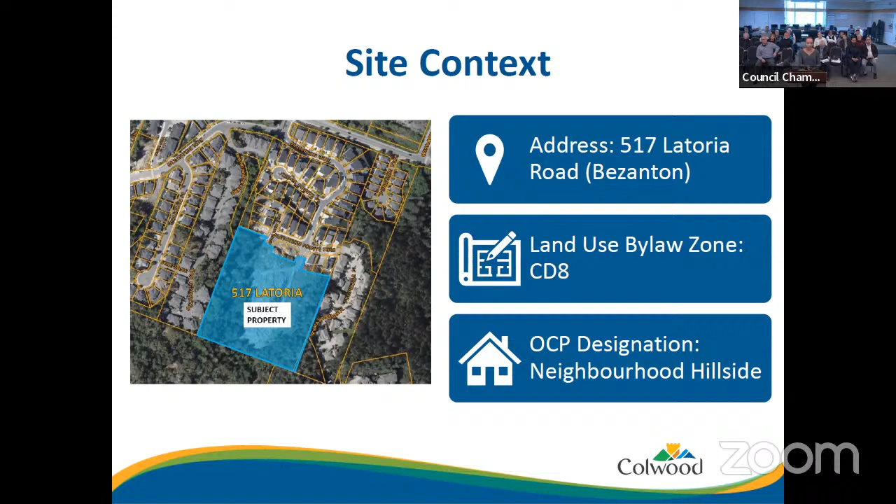Starting with the built form policy. So the neighborhood hillside designation supports ground-oriented buildings up to 3 stories, including multi-unit townhomes, and it supports a floor area ratio of 1.2. The proposal is for 3-story townhomes with an overall FAR, or floor area ratio, of 0.52. So both of these policies have been met.

With respect to the public realm policies, the neighborhood hillside designation requires proposals to improve the public realm for pedestrians, create a high degree of permeability, including direct walking connections between residential areas leading to and from frequent transit and local transit service, as well as to protect and optimize views from public spaces.

The first phase of this development improved the public realm for pedestrians and created a high degree of permeability, since it provided frontage improvements along the south side of Latoria Road, including a sidewalk, street lighting, curbs, boulevard grass, and trees. Views are not anticipated to be impacted from public open spaces such as Latoria Road, Madrona Bank Park, or Latoria Creek Park. So all 3 of these policies have been met by this proposal.

With respect to the natural assets, the neighborhood hillside designation requires that buildings be designed to protect the natural assets of the lands, consistent with site adaptive planning policies. Site adaptive planning is a general approach that involves identifying buildable and non-buildable areas and arriving at a site plan that reflects site opportunities and constraints, maintains natural systems, and minimizes disruption to natural features. Development should be clustered to protect and preserve natural features, and when development is proposed on a greenfield site, 40% of the property should be retained as private or public open space.

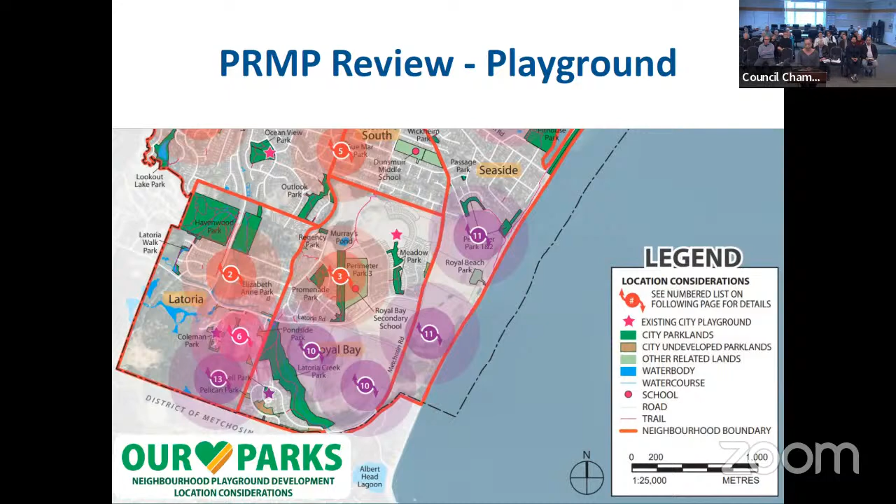As explained in the staff report, Pondside Park is not a viable option for a playground due to its steep terrain and natural features. Therefore, to achieve the objectives of the Parks and Rec Master Plan, the city would either need to identify an alternative location for a playground or have one provided as part of this rezoning application. The staff recommendation includes a requirement that staff first seek endorsement from council through the Parks, Trails, and Recreation Committee on this playground location before advancing it to first reading.

The Parks and Rec Master Plan also shows a desire for a beach-to-mountain trail network, as shown on this slide, starting at Pondside Park and Propeller Place and ending at Madrona Bank Park before continuing down to Latoria Road. The applicant has indicated that this trail connection might not be feasible, specifically at the northwest corner of their site, due to the riparian area and steep grades there, and therefore they are not proposing to provide this trail connection.

Similar to the previous slide, we'll be making a recommendation to the Parks, Trails, and Recreation Committee and Council on an alternative route connection that can still meet the objectives of this requirement.

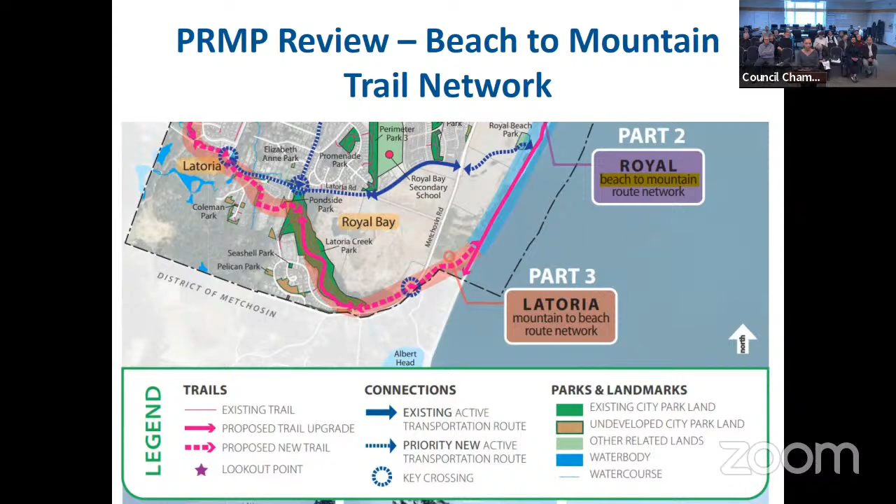Lastly, the Parks and Rec Master Plan also requires a neighborhood connector route, heading alongside North Latoria Creek Park, indicated by the red dotted line at the bottom of the screen. Similar to the previous issues with steep grades and environmental features, that trail connection might not be feasible in this location, and the applicant has indicated they're not able to achieve the connectivity originally envisioned by the Parks Plan. To achieve the objectives of the Parks Plan, alternative trail connections will need to be explored with the Parks Department and brought forward to the Park, Trails, and Rec Committee, as well as Council, for endorsement before we advance this application too far forward.

So the recommendation in the staff report reflects this requirement, and we'll be working with the applicant and the Parks Department to come up with an alternative solution for this as well before we advance this to first reading.

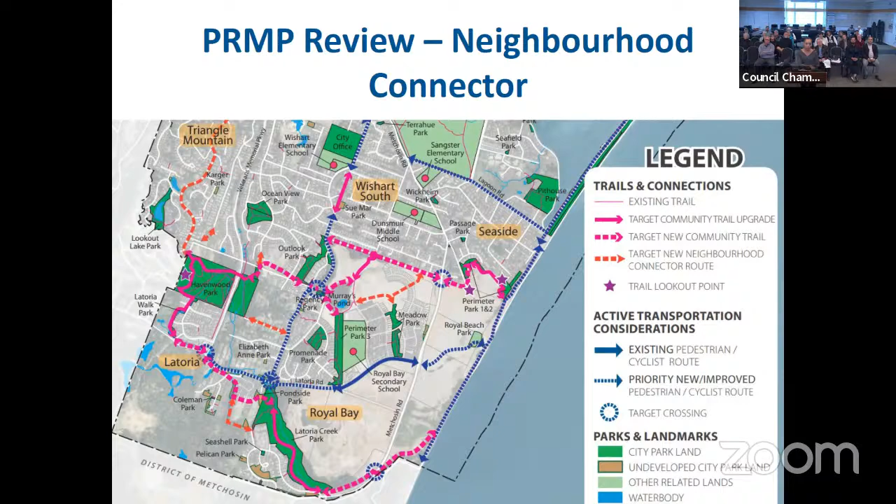With respect to communication for this application, the applicant has led neighborhood consultation in January and February earlier this year. The development notification sign was also posted on the property in February, and before the application advances to first reading, the neighboring properties will be notified by mail via postcards, and advertisements will be published in the Goldstream Gazette.

So the staff recommendation is to rezone the subject property to permit an additional 18 units, increasing from 59 to 77, as well as to permit attached housing and duplex use, subject to the conditions described in the staff report. Other options before you are shown on this slide, and I'd be happy to amend these as seen fit by the Planning and Land Use Committee. I think that's all for me.

The applicant is also here tonight and will be presenting to you as well, and we're both available if you have any questions afterwards. Thank you.

Great, thank you Desiree, appreciate that. We do have the applicants here as well. I believe Ivana and Ivana — I'm going to butcher your name, I'm sorry — Kavarchuk, and Mike Wignall, of course. So if you're ready to go. Thank you, Mike. Thank you.

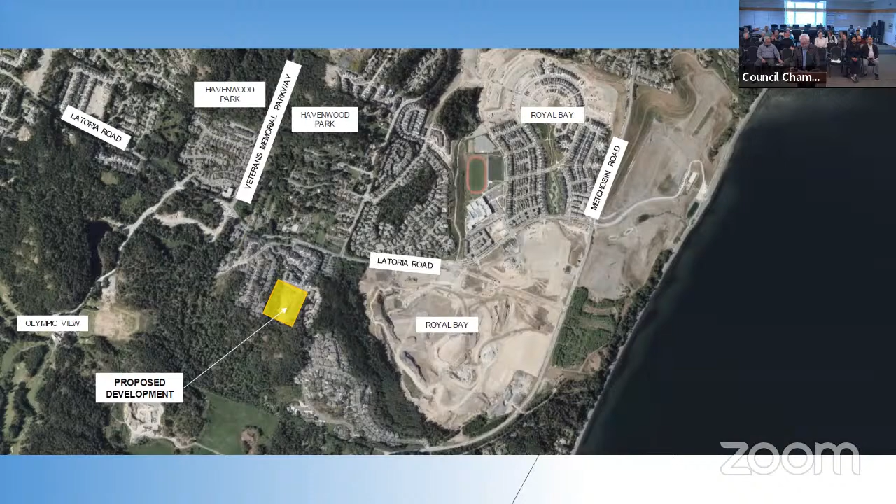Now, location. The site is located immediately south of Elevation Pointe Terrace, as Desiree has already said. It's shown in yellow on this slide. You can see Latoria Road slightly to the north, Royal Bay to the east, and Veterans Memorial Parkway to the northwest. This is a zoomed in version of the location plan.

Originally, the entire site fronted on Latoria Road, hence the address of 517 Latoria Road. As the first phase was developed, the remaining undeveloped piece is still referred to as 517 Latoria Road, even though it no longer directly borders Latoria Road. So that little bit of addressing bureaucracy was a source of confusion for some of the neighbors, as they assumed the site was on Latoria Road.

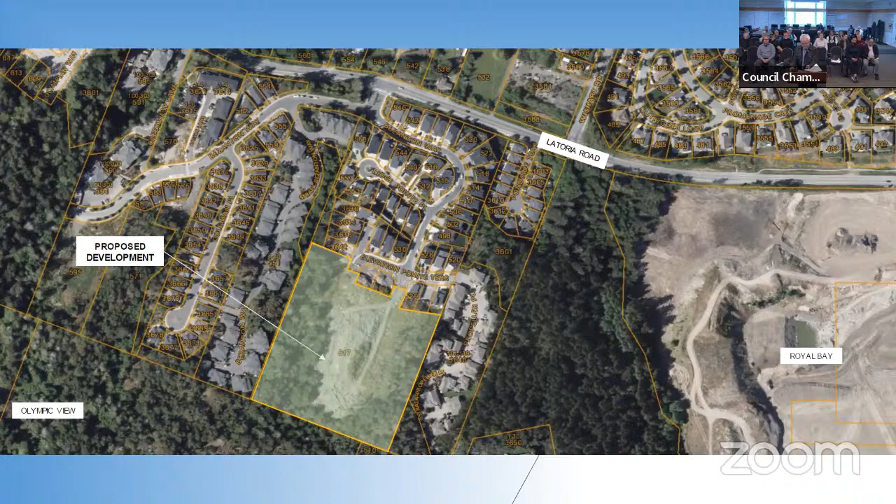This is a tighter version of the site. North is to the right on this picture. You can see Bezanton Way winding up from Latoria towards the site. Elevation Pointe Terrace runs up and down to the right of the site. Madrona Creek is to the west of the site, or the top of the picture. And Propeller Place is at the bottom of the picture, to the east of the site.

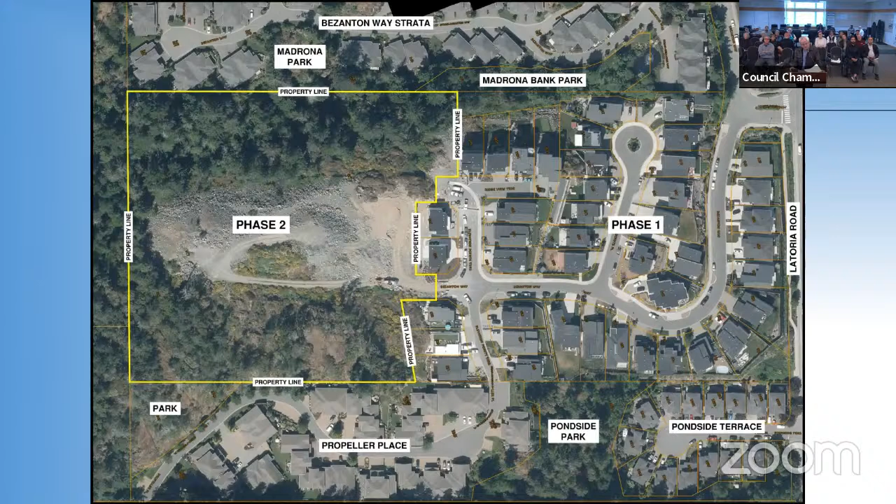The site history - let's just back that up. As I said earlier, the ownership group has owned the property since 1998. Phase 1 was completed in 2017. And phase 2, the current phase, we've been working on since 2017, trying to come up with a version that makes sense from a feasibility point of view and an approvals point of view, et cetera.

In the intervening years, we've spent a lot of time with the ownership group, City of Colwood staff, the project arborist, the landscape architect, and the biologist. We've also enlisted the help of a traffic consultant and a sharp-tailed snake specialist along the way.

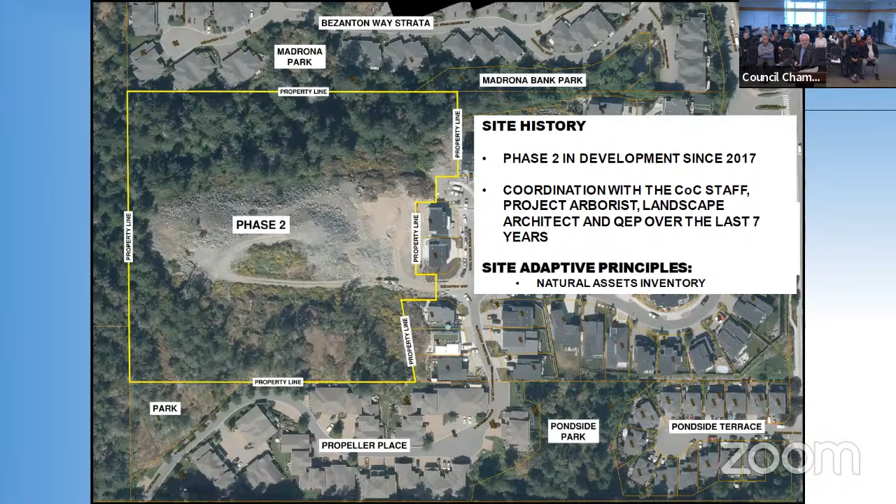We've employed site adaptive planning principles. We've done a natural assets inventory. We've looked to protect habitat areas. We look to incorporate existing natural features. We're going to retain the tree buffers, minimize ecosystem disturbance, and maintain water flow pathways.

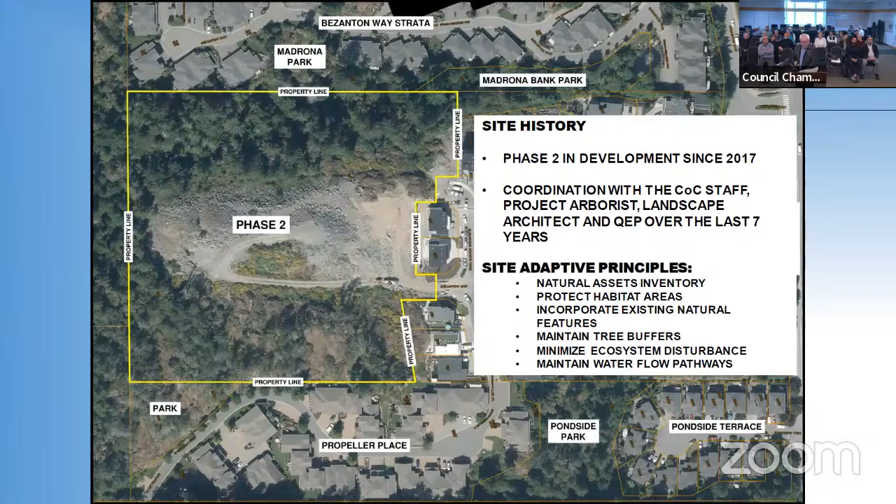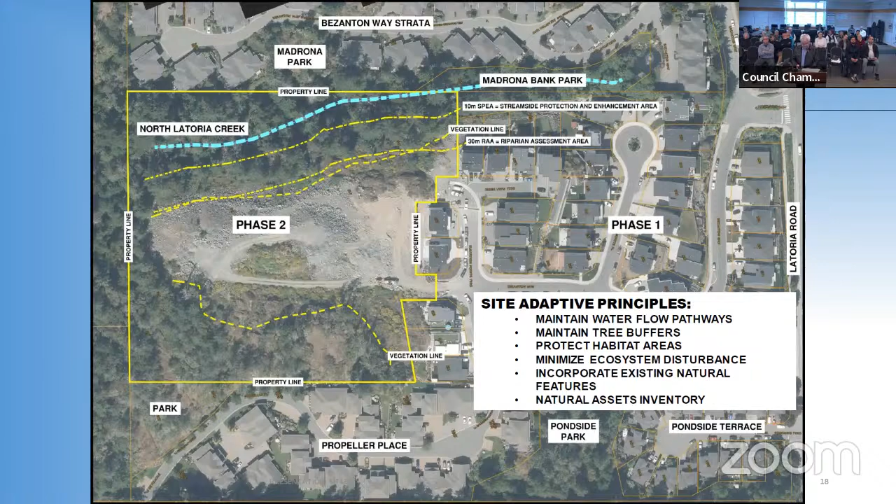And then here we are with the topography. You can see the various constraints encircle the site. The middle, where it's the blasted rock stockpile, is free of encumbrances. You'll note the land slopes steeply upward from Latoria Creek, or Madrona Creek, up to a plateau area where we have phase 2 labeled, where we would have the proposed development. And then there's another height of land on the east end of the property in the do-not-disturb zone that provides a natural topographical buffer from Propeller Place.

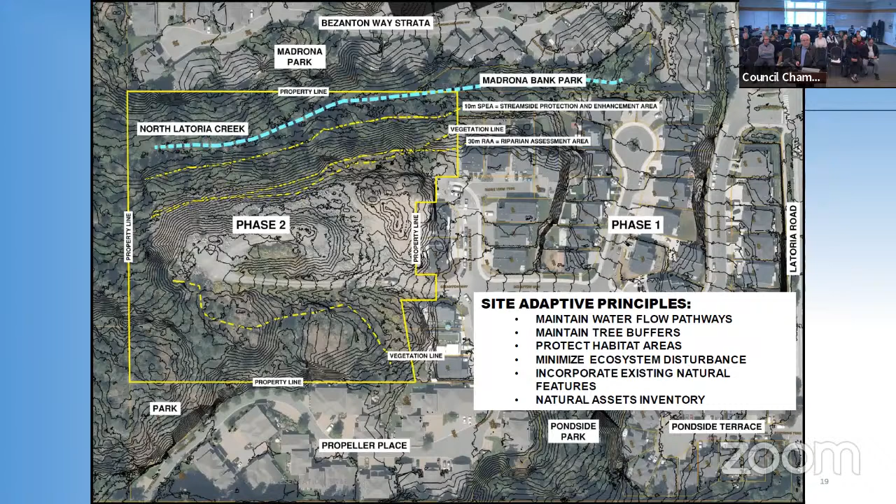Here is the current proposed layout of the site. As I mentioned before, we have one single family lot located in the middle upper of the screen, intended to fit into the existing neighborhood.

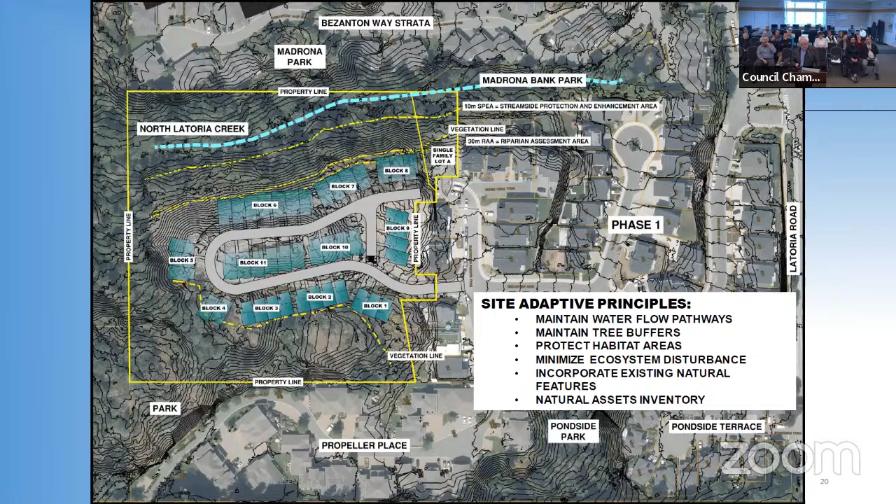The rest of the site is 44 townhouse units proposed. Here's a cleaner version without the contours.

As Desiree says, we're proposing 15,500 square meters of open space, which is a little over 50% of the project area.

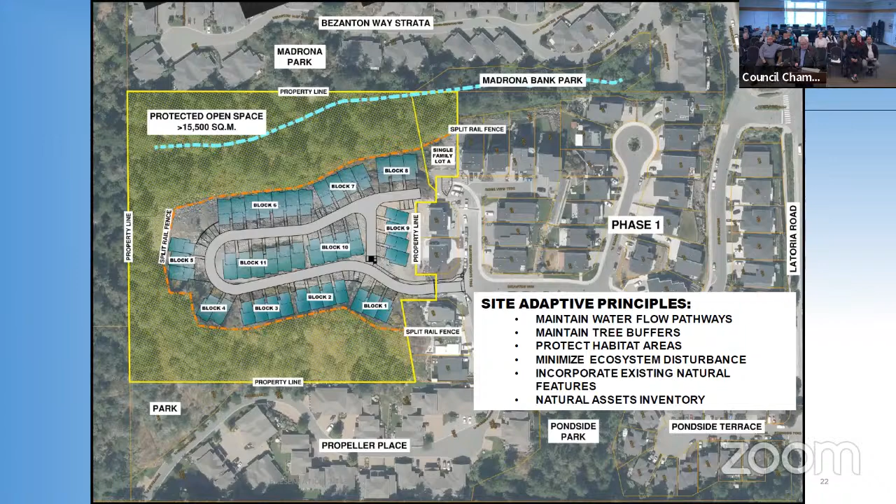We had 2 community meetings. We've worked with the team since 2017, and following our initial application we went through several tweaks and adjustments. We're convinced in the viability and technical feasibility of the proposed development, and we felt it was time to go to the neighborhood to show them our proposal.

We had 2 meetings, one on January 24th and a follow-up on February 12th, both at Wishart Elementary School. Attendance at both meetings was about 30 to 40 people.

There were a number of concerns raised: loss of privacy for existing residents, density being too high, traffic generated by the development, and the amount of visitor parking we were proposing. There were questions about impacts on the existing trees and Madrona Creek, and concerns about emergency vehicles accessing the site as well as our on-site road design.

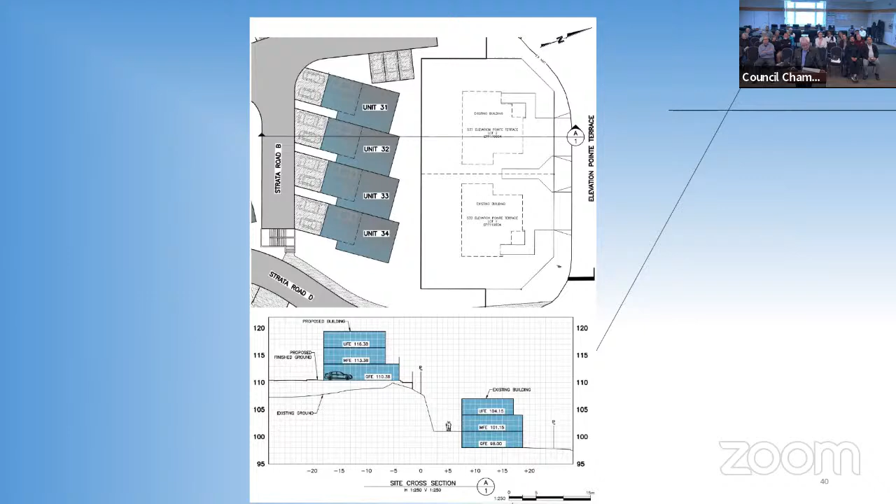There was also concern that we originally had a townhouse unit on the fee simple lot next to 3642 Ridgeview. As I've said earlier, we changed this from a townhouse block of 2 to just a single family dwelling. So this is just going to be another house in the neighborhood. It's topographically separated from the rest of the site and quite a bit lower, so it just seemed natural to make this visually a single family lot to address on its own.

For density, there's concern that phase 2 was originally expected to be 27 additional single family lots with suites. The original 27 lot layout would have caused more disruption to the existing forest surrounding the site because of larger footprints. It would also potentially generate traffic from not just 27 houses, but 27 suites as well, if every house was suited.

So while people are concerned that 44 townhouse units is quite a bit larger than the 27 lots proposed, in terms of traffic flow and units I think we're going to be less, because there will not be suites with the townhouse units. We've also had our traffic consultant review the latest proposal as well as earlier ones which had more units, and no issues were found. The roads were not being over-trafficked, and the intersection at Bezanton and Latoria was not at a point where it needed a signalized intersection or anything like that.

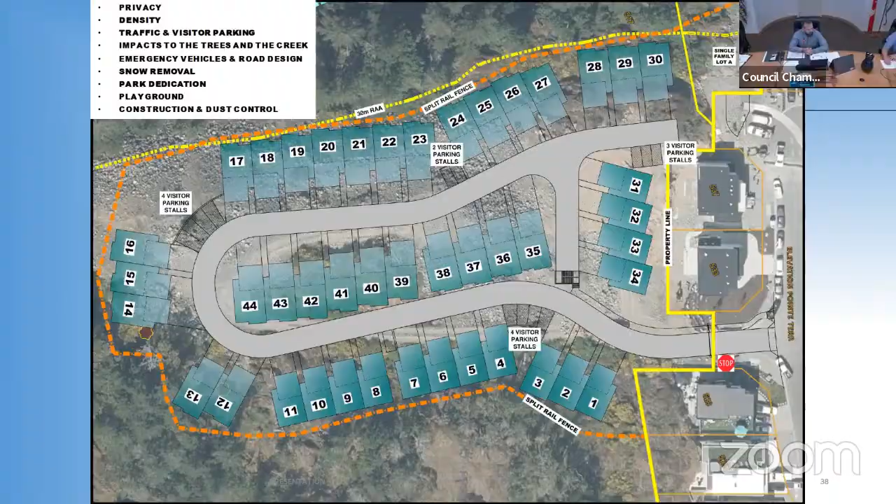This question is for both the city and the developer. The first question I want to ask is about the evolution of this particular development and the proposals you've made. When it started out, when you applied to the city, did you convey the fact that a playground was not feasible? And also did you convey - upselling is probably not the proper term - the notion that it would originally have been single family dwellings, and then you changed your plan to move to presumably higher density? I understand your point that townhouses don't get suites, which speaks to density, but I'm trying to get a chronology here. Was a playground ever in the plan? And Ms. Gibbons, I'd like to hear your input too, because I want to hear from both parties, to understand how this all evolved.

I'm going back a long ways here - I started working on the project in the early 2000s, and then the project evolved. At one point I had a project manager working for me who ran with the project for about a decade. I recently, in the last few years, came back involved in it. From my memory, since I wasn't directly involved in the first phase, there was a layout with single family housing up into this phase 2 land, and some smaller areas of park saved toward the east and the higher areas of the site. I don't recall it being discussed as a playground specifically - I think it was clearly identified as park - but Desiree might be able to clarify that.

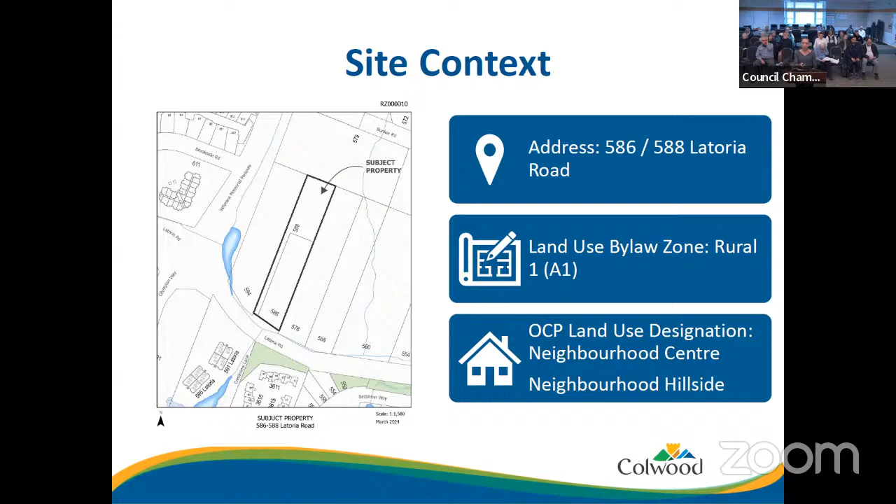The application doesn't comply with either of these two land use designations, and I'll highlight where it deviates from the OCP designation in the next few slides, starting with the neighborhood center designation. In neighborhood centers, the built form supports low-rise multi-unit residential buildings up to 4 stories at the core of the centers. The application before you tonight is for a 6-story apartment building, so it doesn't comply.

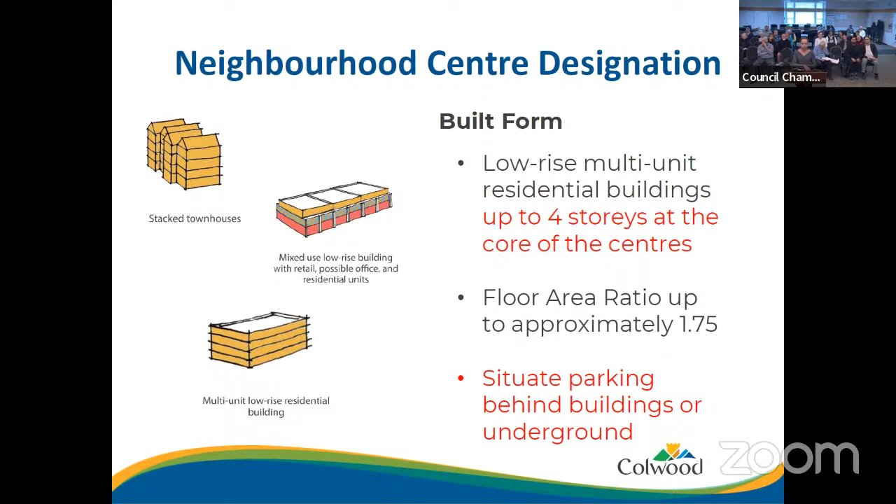The floor area ratio is permitted to go up to 1.75; the applicant is proposing approximately 1.6, so that's compliant. The OCP also encourages parking to be situated underground or at the rear of buildings. The applicant is proposing 2 stories of above-ground parking as well as surface parking on the adjacent sides neighboring the lot at 594 Latoria Road. Staff understand that because of site conditions, underground parking could potentially be challenging here. However, the OCP does call for parking to be located underground when possible.

In terms of land uses, the OCP supports small-scale neighborhood-serving retail uses. This application includes a daycare proposed for the ground floor, which would be an example of a small-scale neighborhood retail-serving use, compliant with this designation. It also supports a range of housing types and choices to support businesses. The proposal is for a 122-unit apartment complex, which would increase housing choices for future residents of Colwood and attract them to use businesses in the neighborhood center designation.

In terms of the public realm policy requirements of the OCP, it encourages high quality public realm, including spaces for gathering, creating a high degree of permeability, including direct walking connections between the residential developments and the frequent transit network on Latoria Road. It also encourages protecting and optimizing views from public spaces such as Latoria Road. This proposal achieves all of those requirements, including providing frontage improvements along Latoria Road, which could potentially include sidewalks, landscaped boulevards, and a dedicated bike lane.

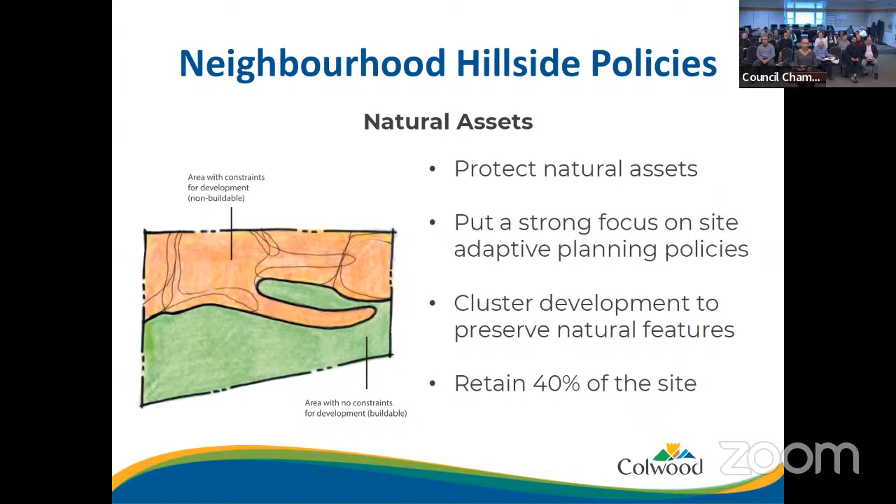Just in terms of the communication, the applicant did lead neighborhood consultation in June 2022, and the development notification sign was posted on the property in the fall of 2023. As I had mentioned, there is a neighborhood visioning exercise that is being undertaken for the Latoria North area.

So the staff recommendation is to postpone making a decision on this application until council first endorses one of the vision options for the area. This is partially because this visioning exercise will have significant, or potentially significant, implications for this proposal, and may even permit what is proposed without needing to amend the OCP.

This is a staff recommendation, but if you do support the application going forward, it would require an amendment to the OCP because it does not comply with either the neighborhood hillside or neighborhood center designation. But these are the options before you. Option 2 is to revise the application so that it does comply with one of the land use designations. Option 3 would be to prepare amendments to the OCP as well as the land use bylaw to support the proposal as it has been shown. Options 4 and 5 are to deny the application or to select another option as selected by committee.

And the applicant is also here tonight to provide or to present their application, and both of us will be available for questions if you have any afterwards.

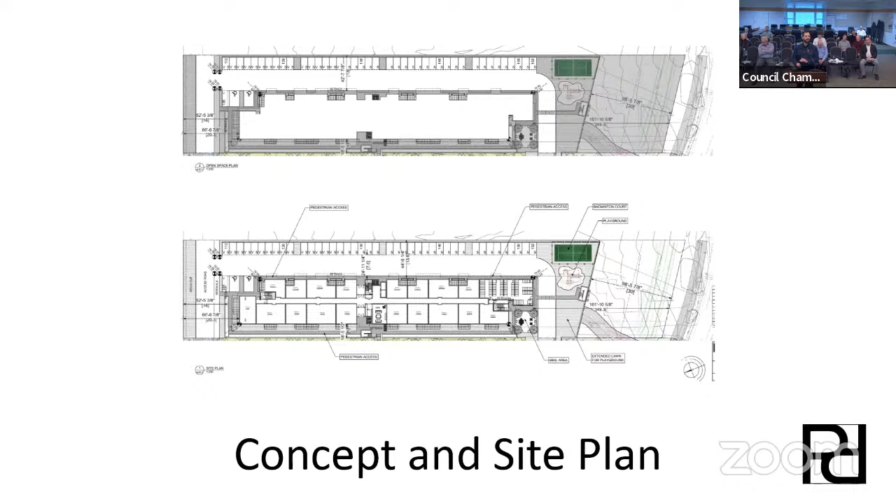And being able to benefit maybe some of the public amenity space by sharing those resources - having access points, having facilities designed and shared in tandem as one site's being built and the other can continue to be developed with a similar comprehensive vision.

Talking specifically to the alternate access onto Latoria Road, 594 Latoria, if you look to the bottom right here, you see the 594 Latoria Road access. Currently there is an existing access which would be maintained, and the initial proposal was to fork into 586 and 588. We're now looking to request moving that entire access as far back as possible to the top of the entry of 586 and 588 Latoria.

This benefits internal traffic flow. If you look at the way this road is positioned, it allows flow between the two parkades to be done, allowing traffic in and out of the two buildings to flow into the north road a lot easier, which would allow for exit onto VMP.

For the entry access, which would most likely be a right turn entry from Latoria Road, this would push it back away from the corner, so it wouldn't bottleneck potential traffic or bottleneck tenants turning into the property itself. So it supports, in my opinion—and I'll ask for commentary from our civil engineers if necessary—

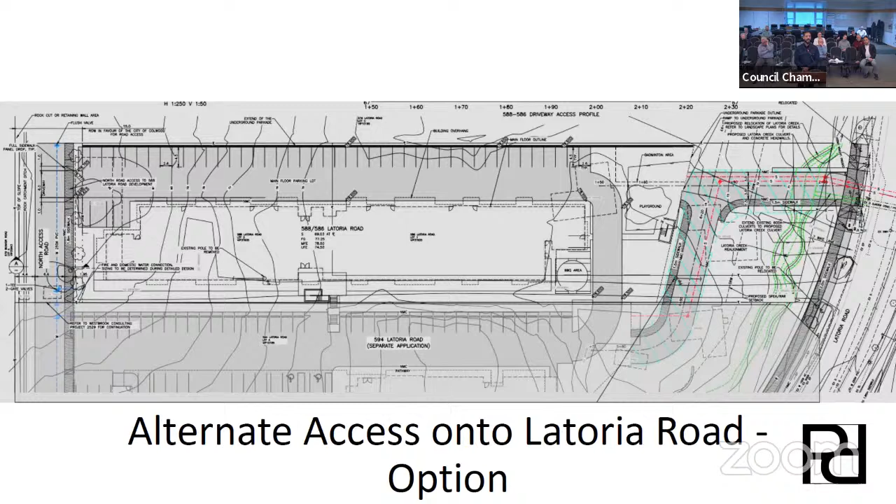it would improve substantially how traffic happens and enters into the subject properties. The creek realignment is a key item here, and I want to highlight that. It does a few things: it improves and enhances Latoria Creek substantially. At this point, Latoria Creek really is more of a ditch than a creek. Unfortunately, it's a hotbed of garbage and waste that's been strewn in from wherever. This realignment was done in line with the visioning happening with the enhancement of the corner at VMP and how that realignment was positioned to happen.

A little bit of context: we provided a statutory right-of-way on 594 Latoria to allow for realignment of the creek. A lot of that realignment was that the SRW was provided for realignment to happen in tandem with 4-laning or 5-laning Latoria Road, widening of Latoria Road. We understand that may or may not happen in the future. However, we've still provided the process and way to do that on 594, which allows for a substantial enhancement of the creek—by pushing it back, allowing for widening, allowing for new planting, and really making it able to bear life that can access Latoria Creek, hopefully in the future.

This is an exercise that would happen with all the landowners going all the way through into Latoria Creek. I can speak to ourselves being 594, 586, 588 Latoria, and 568 Latoria—we're committed to the realignment and enhancement of the creek. The other landowners I can't speak to directly, but from conversations with them they are also open to that and working in tandem to enhance the frontage on Latoria, having built that into their plans as well for the creek realignment, which is a substantial repairing and improvement.

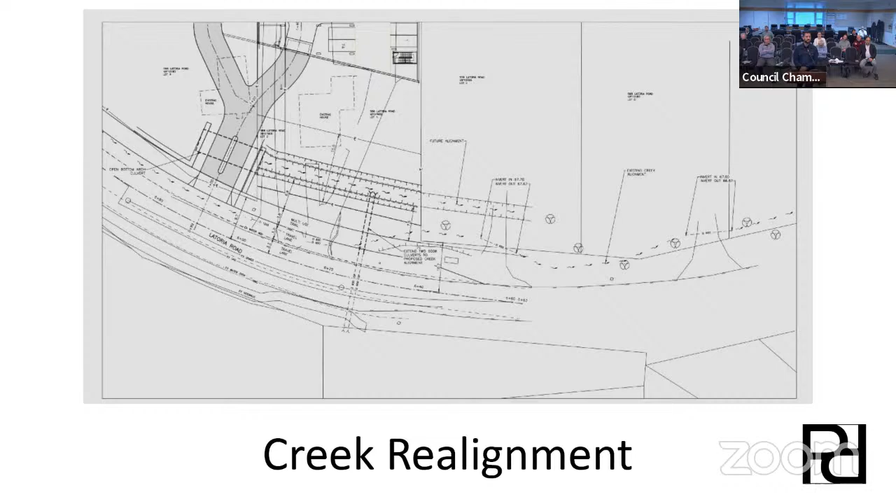It also provides a lot of landscaping and planting to provide a green buffer and privacy for the subject properties and hide them from street view. The current state of the creek does not reflect a supportive habitat area. Realignment would allow for a future habitable area—it could bear fish and be an actual meandering stream, which it does not right now. It's a beautiful natural buffer to the project with proposed planting, and a huge benefit to the neighborhood and ecology.

A little bit on the landscaping plans, you can see that in more detail. 586, 588 Latoria as-is does not have substantial treeing—there is a tree inventory that's been provided. This treeing and landscaping being proposed would actually provide much better enhancement than is currently on the site. You'd see substantial improvement where you can see the sidewalk, the creek realignment happening, and behind that the green buffering before you reach the new proposed development itself.

You see the proposed road in line with that, where it would be pushed back as far as possible to the top of the creek. So the actual access would be at the narrower point and would be a lot easier to fulfill from an engineering and improvement perspective—moving the proposed access on Latoria Road from 594 to the top of 586 and 588. In my opinion, this actually makes for a better repositioning of the creek.